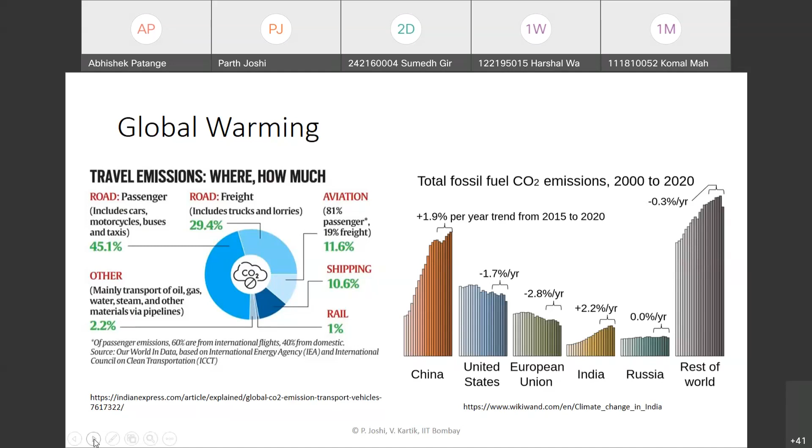Because the transport sector is a significant contributor to this issue, some alternative source of energy has to be looked at so as to curb these emissions.

If we look at the issue of air pollution, the pollution level in India has been witnessing an alarming rate. India was ranked around fifth among the world's most polluted countries, as reported by IQAir statistics. Among the most polluted cities, six out of the top 10 were in India.

If we look at the rankings by AQI for 2021, India was the ninth most polluted country in the world, and among the top 50 most polluted cities, 43 Indian cities were among the world's top 50. So we can see that the overall air quality in India has been becoming worse and worse every day.

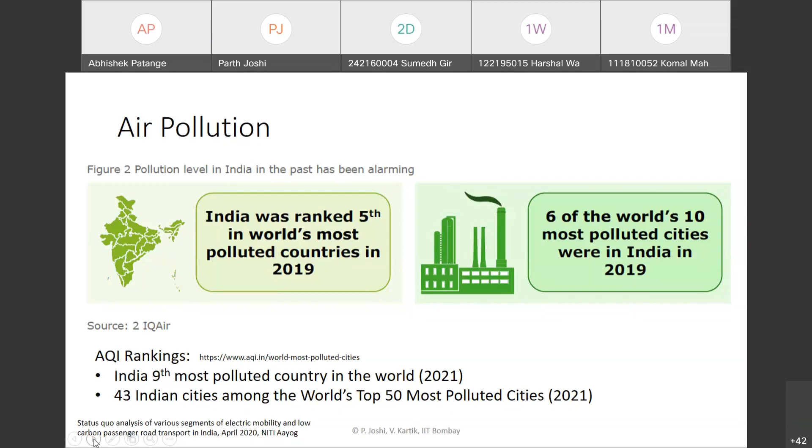One of the major pollutants contributing towards this are particulate matter of 2.5 and 10 micron size. This is because transport-related issues: there are a huge number of private vehicles in Pune due to the public transport situation, and currently there is a lot of metro related construction going on, causing traffic congestion in the city. We can see that being reflected in the air quality. The construction work is causing traffic congestion, and that's why the transport related emissions are very high in the city.

If we look at the oil and natural gas availability domestically for India, India has a very little share of oil reserves and natural gas reserves, about just 0.3% of the global oil reserves, and natural gas reserves are as small as 0.7% compared to global reserves. And if we see the trend in terms of availability, it has been largely declining over the years.

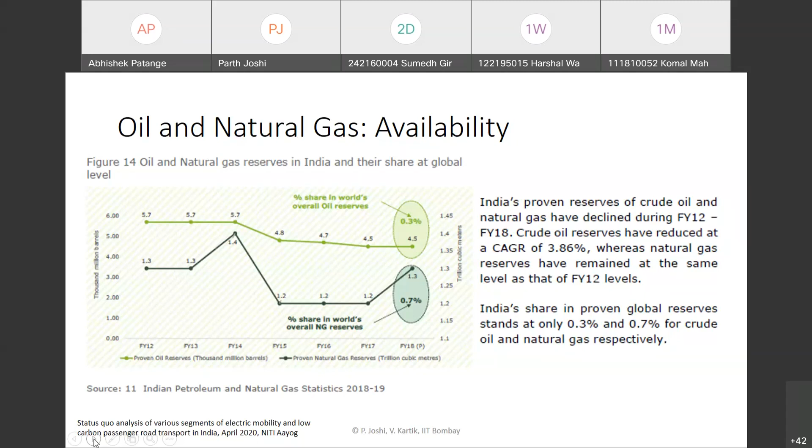There is a lot of dependency of India on imports. India has to import crude oil and natural gas substantially. If we compare the amount of production and import between financial year 2013 and 19, the production of oil has actually gone down, whereas the import has increased substantially. The import dependency has increased from about 84% to 88%. Whereas for natural gas, it has increased from 23% to 36%.

Oil and natural gas are both essential for producing fuels required for petrol and diesel, so the oil import bill has been always on the rise. For financial year 19, only 12% of the overall crude oil demand was met by domestic production, and for natural gas it was just 64%.

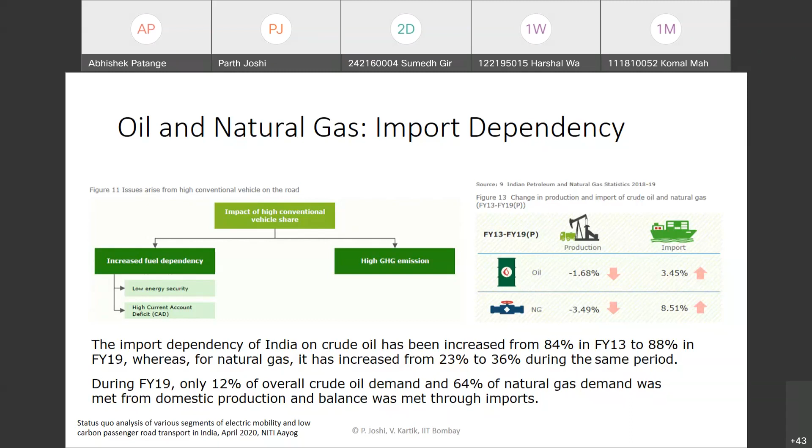So as we have seen, the issues of increased dependency of the country on conventional fossil fuels - if we have high conventional vehicles in the way ahead, the amount of import bill will keep on increasing, and greenhouse gas emissions would increase. India, as part of its commitment to mitigate this issue, signed the 2015 Paris Agreement. In the Conference of Parties, India has pledged to reduce its carbon footprint by 33 to 35% by 2030, to levels about which were there around 2005.

It has also pledged to increase the share of non-fossil fuels based electricity to about 40% by 2030. India has also set a target to reach about 30% EV electric vehicle sales by 2030, largely in the passenger cars segment.

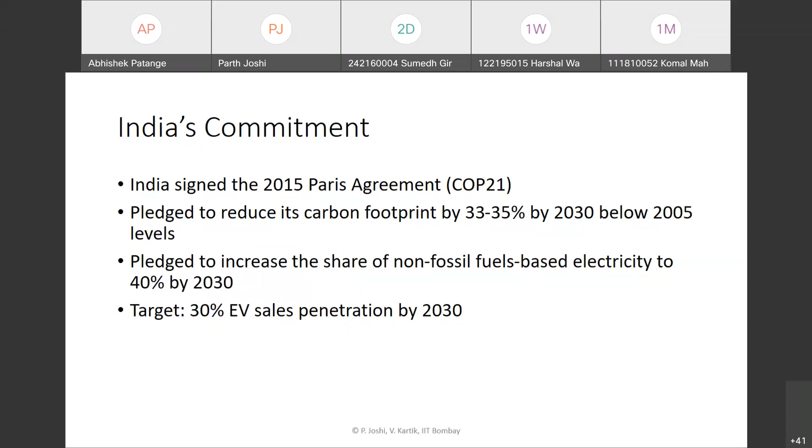So if we see the way ahead, it seems that electric vehicles are a promising pathway because they use electricity, which is clean energy, to increase energy security, reduce the country's dependence on oil imports, lower carbon dioxide emissions, and improve air quality in Indian cities.

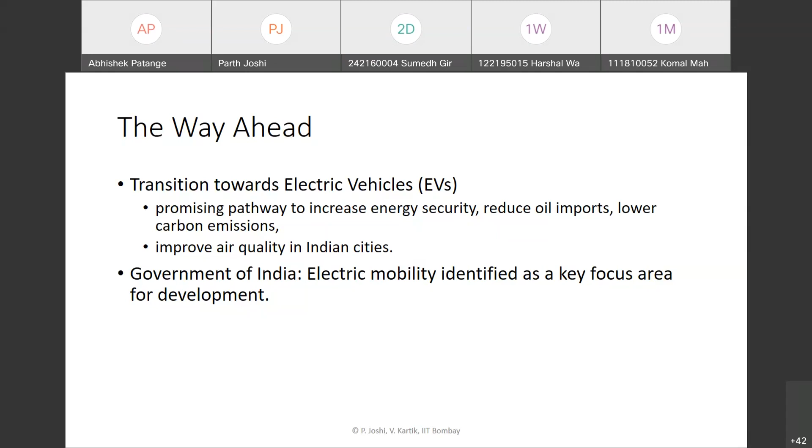Therefore, the Government of India has identified electric mobility as a key area of focus for further development, and the government has been pushing for electric mobility in personal vehicles as well as public transport through several initiatives.

If we look at the possible technology options which are clean, or involve zero or low carbon footprint, we can categorize them as electric mobility or low carbon technology. Low carbon technology would comprise fuels like CNG, LPG, methanol or ethanol - alternative fuels derived from more sustainable sources, which give rise to lesser emissions compared to petrol or diesel.

We also have other options like battery powered vehicles or fuel cell powered vehicles. Currently, over the last few years, the government has mostly been looking at battery powered vehicles.

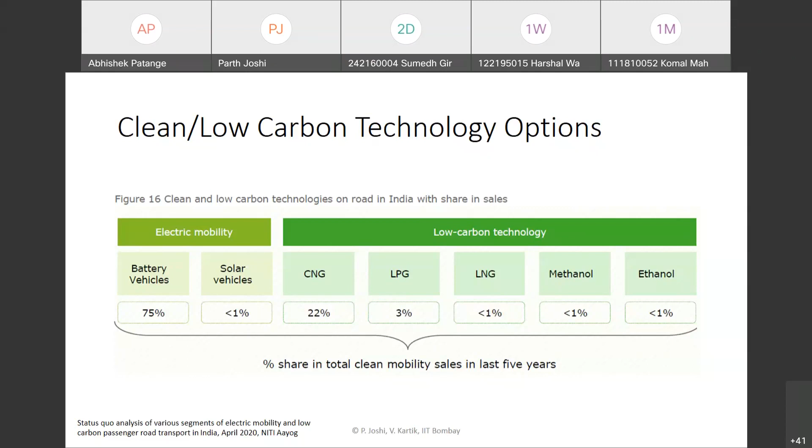As part of this transformation into electric mobility, NITI Aayog has proposed a new mobility paradigm involving shared, electric and connected mobility. This involves a larger amount of shared transportation - using more public transport instead of personally owned vehicles, more electric vehicles, and also connected vehicles, using artificial intelligence and similar technologies to draw on data and derive meaning from it, to develop useful solutions and make mobility related systems more efficient.

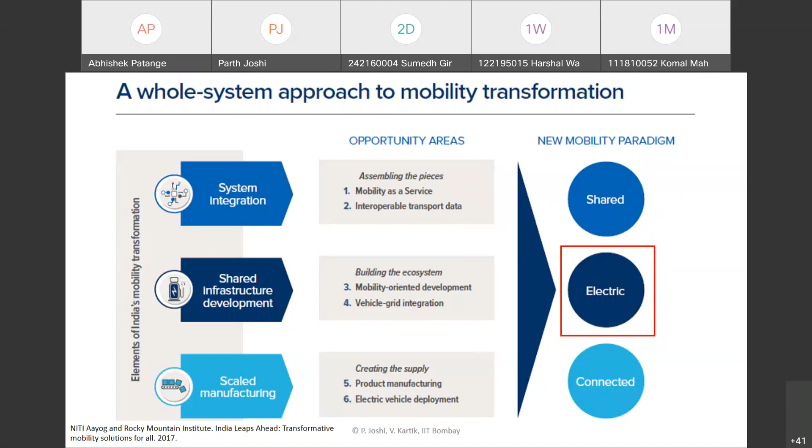The Government of India has been taking up several initiatives starting from 2011, when they launched the National Council for Electric Mobility, and around 2014 they launched the National Electric Mobility Mission Plan for 2020, where they defined several initiatives.

Around 2016 or so came phase one of the FAME India scheme. FAME stands for Faster Adoption and Manufacturing of Electric and Hybrid Electric Vehicles - a scheme to incentivize the purchase of electric and hybrid electric vehicles. This scheme was not very successful, but it provided some initial momentum.

Then around 2018 or 2019, the government launched the second phase of the FAME scheme, which provided further incentives, with an outlay of around 10,000 crore plus whatever residue amount was allocated to phase one of this scheme. So there is a huge outlay for this particular scheme, involving several incentives.

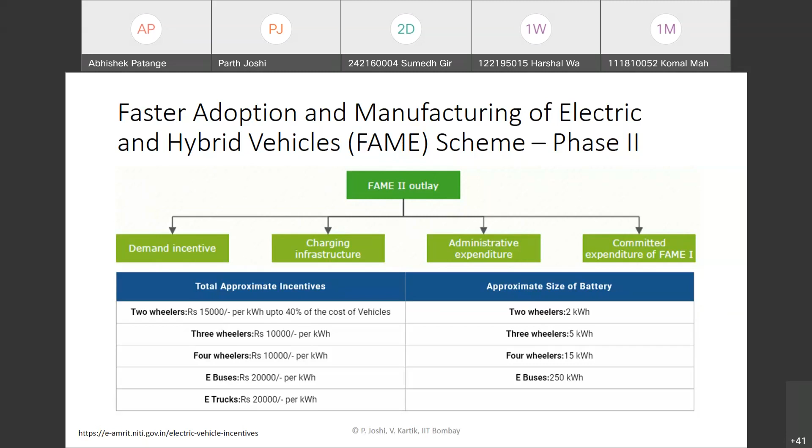Niti Aayog did a study to estimate the potential benefits of this scheme if implemented as planned, considering vehicles eligible under FAME, whether private two-wheelers, four-wheelers, or buses. Potential savings of about 5.4 million tons of oil equivalent are estimated, amounting to savings of about 17.2 thousand crores in energy.

The oil import bill is expected to be substantially reduced because of this. A substantial reduction in overall energy consumption is expected, about 170 petajoules, and about 7.4 million tons of CO2 emissions are expected to be reduced over the vehicle lifetime.

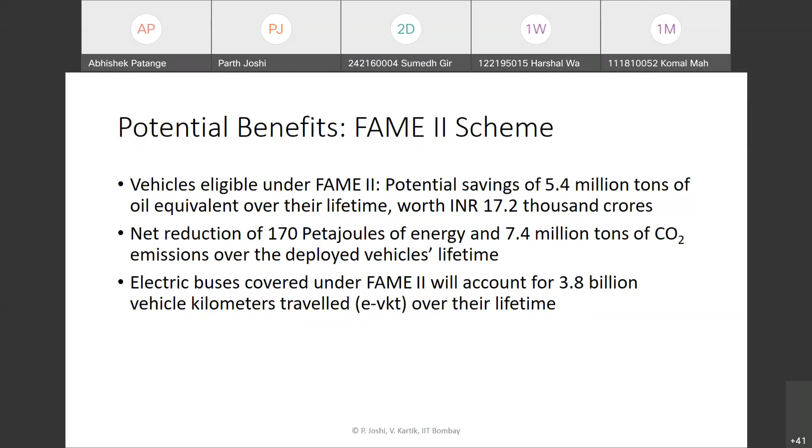These benefits are really promising. A further study was done by Niti Aayog considering the scenario till 2030, projecting the total energy savings and the amount of savings in CO2 emissions. These are very promising.

About 846 million tons of CO2 emissions would be reduced, and oil savings of about 474 million tons of oil equivalent. This is a huge number. We can see that this overall transition to electric mobility is very promising.

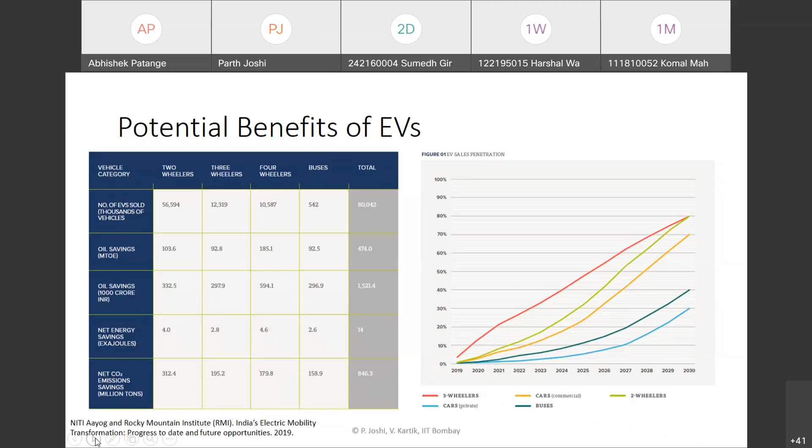Till now we have seen the overall background, and in the current scenario it is very important to study electric vehicles. So finally, we come to our topic of automotive transmission.

Before that, I just want to know if anyone has any questions or comments. I'll take a pause for a few seconds. Anyone has any feedback or comments to share? Am I going too fast or too slow? Any comments? It's just right, okay.

Sure, then we'll move on to our actual topic. The automotive transmission, while designing them, we have some major functional requirements. If we have to list them, I would like all of you to contribute in this discussion, so it should not be a monologue where I am just speaking, as it will become really boring. I would like all of you to contribute in this.

If we want to design a transmission for any particular vehicle, what are the factors we would consider? What different attributes would we consider? What are the different factors that are important when we want to design a transmission? Any guesses? Any ideas?

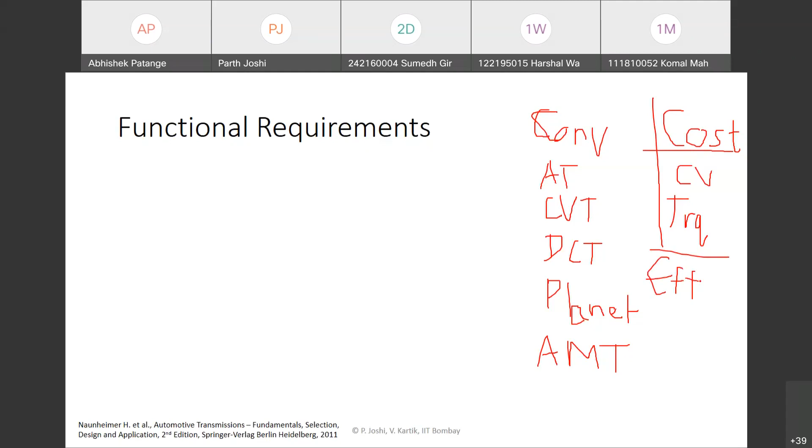So I was looking for something like this, like factors like cost, or one factor may be efficiency. So we need to have a high efficiency transmission.

So if we look at the different functional requirements of transmission, we can probably come up with some of these factors which have been listed out. Some of you already covered, like high efficiency or cost, and you also covered some applications.

Basically, we need a fuel efficient way to transmit power from the source to the load. This is the major part of the transmission design, the major requirement, and we'll also be mainly focusing on this in this particular unit - how do we efficiently transmit power from the source to the load for different operating conditions?

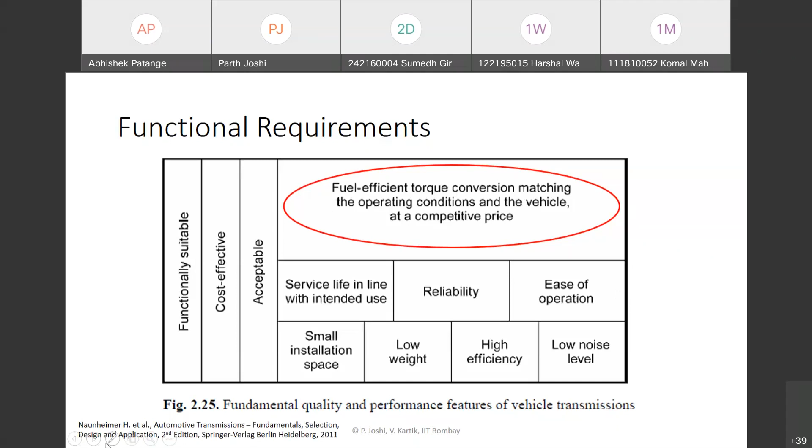There are other factors like reliability or ease of operation. So as you mentioned, AMT for ease of operation - DCT or AMT or AT, whatever for that matter, they involve minimal effort from the driver. So they involve a lot of ease of operation, but they may not always be reliable, or they may not be very cost effective.

DCT is basically dual clutch transmission - I'm not sure if others are aware of this technology. It's an expensive technology, although it provides very smooth shifting between gears. Automatic transmissions involve torque converters, which are not very highly efficient - they involve a lot of losses and heat generation. The automatic transmission may also become bulky, and even dual clutch transmissions may become bulky. So there are different factors like this.

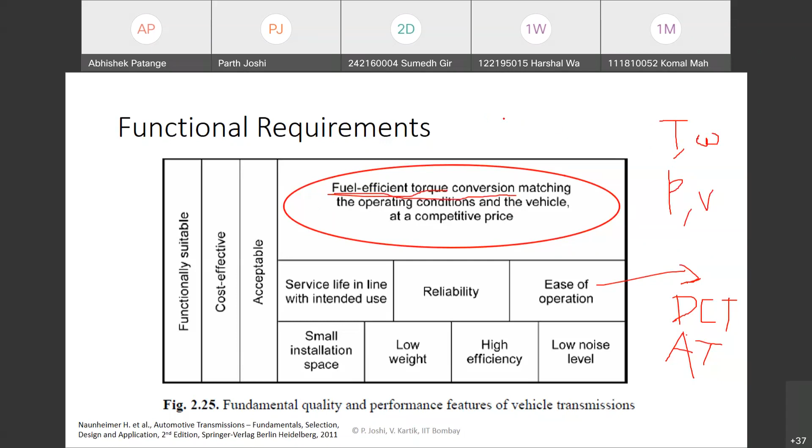The key factor is basically fuel efficient torque conversion. If there is a certain torque and speed requirement at the wheels, or power and vehicle speed requirement at the wheels, and there is a certain source - maybe an IC engine or electric motor or any prime mover - what is the torque and speed at which the prime mover should operate, such that for every power versus vehicle speed requirement, we get the appropriate value of torque and speed so the source operates efficiently, and we also get the required power and vehicle speed.

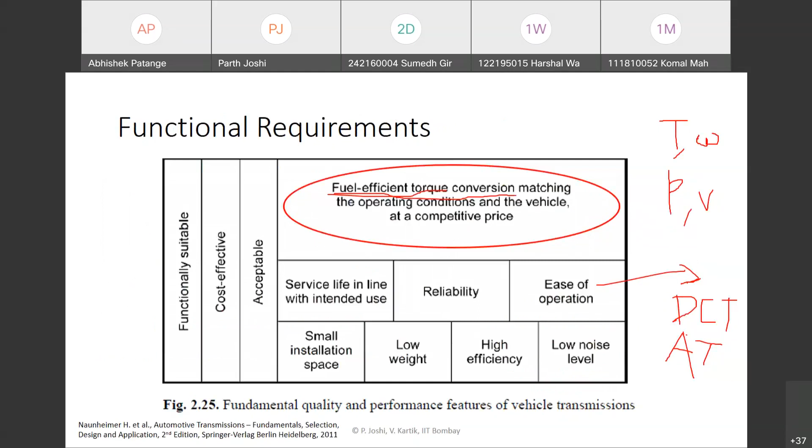If we look at typical power source characteristics, for an ideal source of power, we would like to have the entire maximum rated power available throughout the entire speed range. If you look at the corresponding torque versus speed, constant power would imply torque into speed - power is basically torque into omega, the angular speed of the wheel - that is constant, meaning torque equals some constant divided by omega. So if we look at the torque profile on a torque versus speed map, we can see that this is a hyperbolic kind of profile.

So, sorry for the poor writing.

There is a certain limit because of the interaction between the tire and the road. There is a limit to which the wheel or tire can take up and transmit torque. It is governed by the adhesion limit, a term we will see later on. So basically, there is a certain maximum torque which the wheel can transmit, which depends on the tire material, the road material, the nature of the road, and the operating conditions in that contact region between the tire and ground.

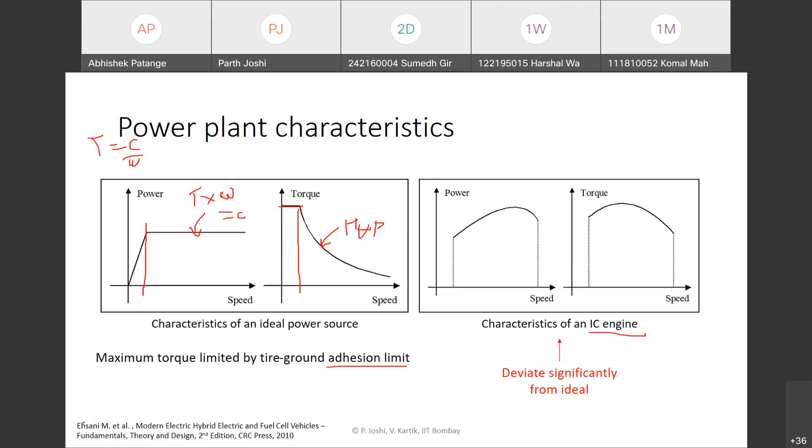So if this is understood, conventional vehicles largely utilize IC engines as their power source. So if we have to answer this question: why do vehicles need a transmission at all? We looked at the characteristics of an ideal power source and that of an IC engine. If we have to visualize the function of a transmission, what do you think is the reason? Why do we have a transmission at all in a vehicle?

In conventional IC engine vehicles, the engine does not have the maximum torque at the start of the vehicle because it gains torque at a higher speed. So to start the vehicle from zero, we need some torque multiplication to propel the weight of the vehicle. That is why we need a large gear, and a large gear cannot take us to higher speeds—it has some limitation in speed. So that is why we need shorter gears as well, and multiple ratios in an IC engine.

As in the case of a motor, we need to reduce the size of the motor as much as possible. So for the required torque, we can use the least size of motor with a single gear transmission, or we can also use a CVT transmission. So the most important thing is that we need torque multiplication in transmissions.

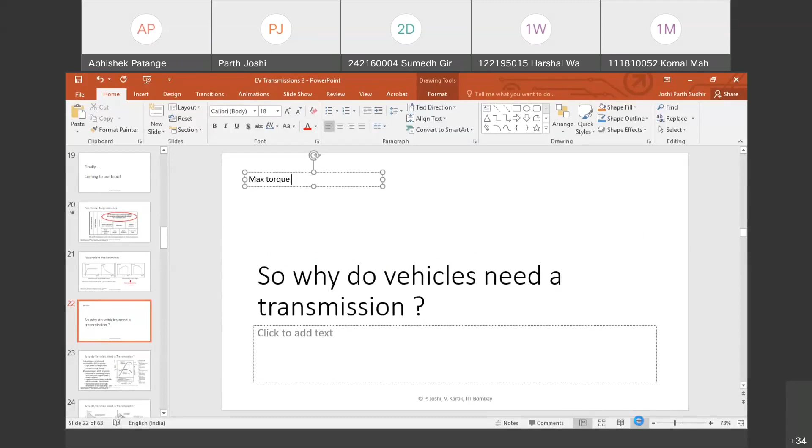So the primary reason for using a gearbox in IC engine vehicles is that the engine cannot provide its maximum torque at the slowest speed, which is basically when we are starting. So we need a large gear to multiply the torque coming from the IC engine to propel the vehicle from start. And since the large gear cannot take us to higher speeds, we need a shorter gear. That is why we need multiple gears in an IC engine vehicle, to satisfy the requirement of the driver's curve. And in electric vehicles, we need it to reduce the size of the motor for the given torque.

So why do you think the IC engine's maximum torque is not available from the starting?

At the start, the speed is less, so we get less power, as much is required. The force required is also less, and force obtained is also less from the engine at lower speeds. Even the combustion is not at its maximum efficiency because efficiency rises at higher speeds, so some of the fuel is just left out of combustion. Pressure is also less in the cylinder.

So as you said, if we use a very high gear we get a boost initially, but we are not able to increase the vehicle speed beyond a certain limit, right? So why is there a certain limit on the engine speed?

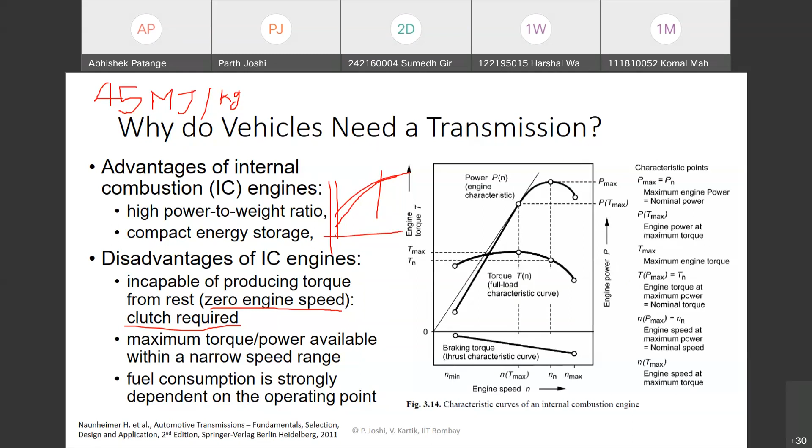So let us say if we do not use a transmission, if we just directly connect the IC engine - let us say this block is the IC engine, and this is the clutch, and we also have a single gear ratio between the clutch and the wheels. So let us say these are the wheels, which includes basically the differential and all these things. So basically there is a single gear ratio between the IC engine and the wheels.

So if we calculate, by multiplying the torque of the IC engine output torque into the gear ratio, that would be basically the torque available at the wheels. And the engine speed, let us say omega e - so r times omega e, where r is the wheel radius, divided by the gear ratio, let us say this is g - that would be basically the vehicle speed, considering this gear ratio.

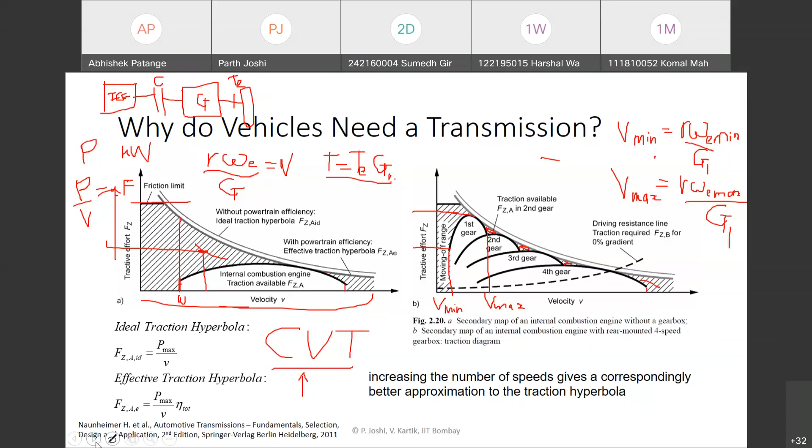So we have seen that by using multiple gear ratios, we are able to cover this torque speed envelope substantially. Apart from that, what the transmission provides us is basically a flexibility or a choice to select the engine operating point. By using this choice, we can place the IC engine point such that we are able to provide the required torque at the required vehicle speed, and we are also able to operate the IC engine in its greater efficiency region.

Let us take an example. If we want to drive our vehicle at a speed, let us say 35 kilometers per hour, and we are driving a car. I hope most of you have learned how to drive a car. So let us say if we take a speed of 35 kilometers per hour for a passenger car, which gear would we be normally operating the vehicle in?

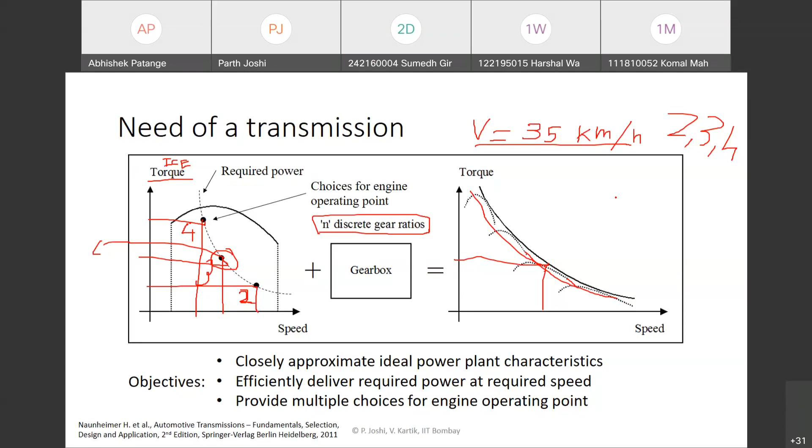So if we look at the typical characteristics of the conventional vehicle's IC engine—basically why I am going into conventional vehicle details is that you probably have learned these things already, but in the context of transmissions for electric vehicles, it is very important to understand. The earlier automotive transmissions designed for conventional vehicles—what factors are they designed based on? The characteristics of the power source itself are so important that they form the basis on which the transmission of any vehicle is designed.

So the transmission is designed so that we can deliver the required torque at the required speed, while operating our power source as efficiently as possible. Based on the behavior of the power source—IC engines in conventional vehicles—we design the gear ratios such that in the typical operating range of the vehicle, we are able to operate the IC engine in its most efficient torque and speed range, and also run the vehicle according to its required power versus vehicle speed map.

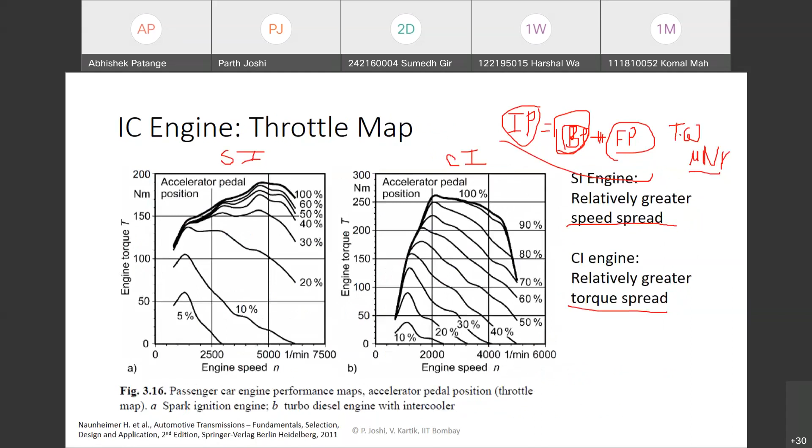Now if we come to electric vehicles, which are primarily powered by electric motors, we have to compare the typical behavior of the IC engine versus that of an electric motor, so we saw the ideal torque-speed and power-speed kind of profiles.

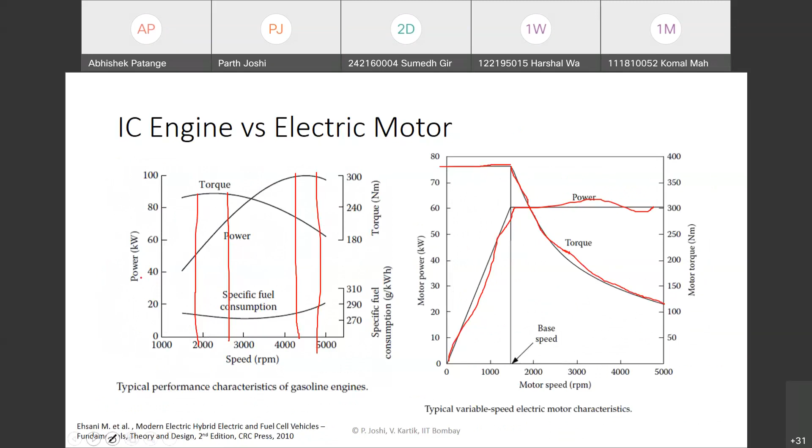Now, we have seen the maximum torque and maximum power characteristics. Now if we look at the aspect of efficiency...

So can anyone tell me what is brake specific fuel consumption? It is the equivalent fuel consumption for a unit of brake power. Okay, so can you tell me the equation to calculate the brake specific fuel consumption? Or let's say, what is the unit, that will probably become easier.

Grams per kilowatt hour. Okay, fine, grams per kilowatt hour.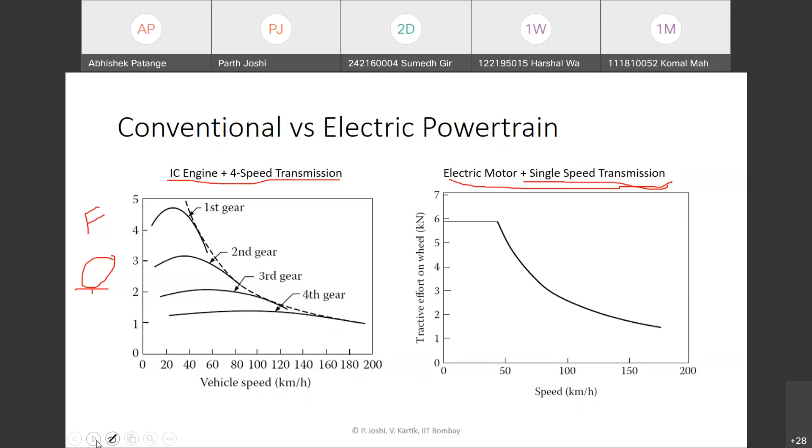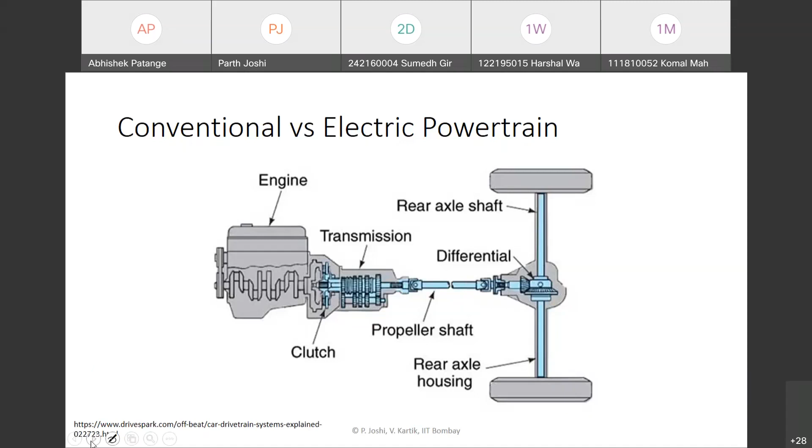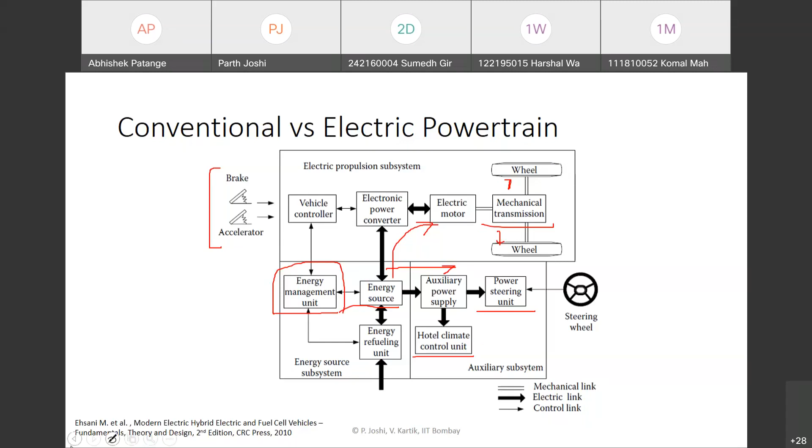So what can we expect in a typical electric vehicle powertrain? I hope everyone understands this word called powertrain. Powertrain basically means the way in which different components are connected from the energy source up to the load, or basically the fuel tank to the wheels, or the battery to the wheels in an electric vehicle. So what can be the different layouts or configurations that we can expect?

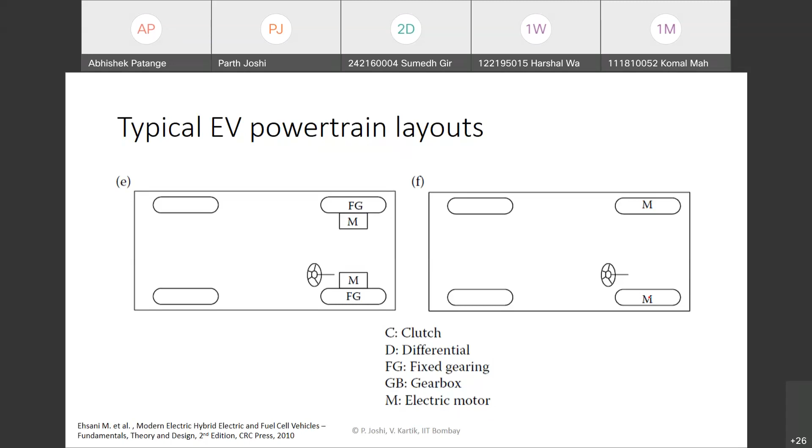So then that may seem very simple, but it's quite challenging to implement because we need a very high torque motor, since there is no gear ratio available. We need very high torque versus very high vehicle speed range of operation. It may be challenging to implement in any particular vehicle.

So these are some typical layouts, and there may be even more layouts possible. Different companies have explored different concepts. Companies like Tesla, Porsche, and other OEMs have all explored different configurations. We'll explore them in our later sessions.

So different particular configurations may be possible depending on the requirement. Many companies have innovated in this particular space. They have come up with very interesting layouts and different ways by which they can meet the performance and efficiency requirements.

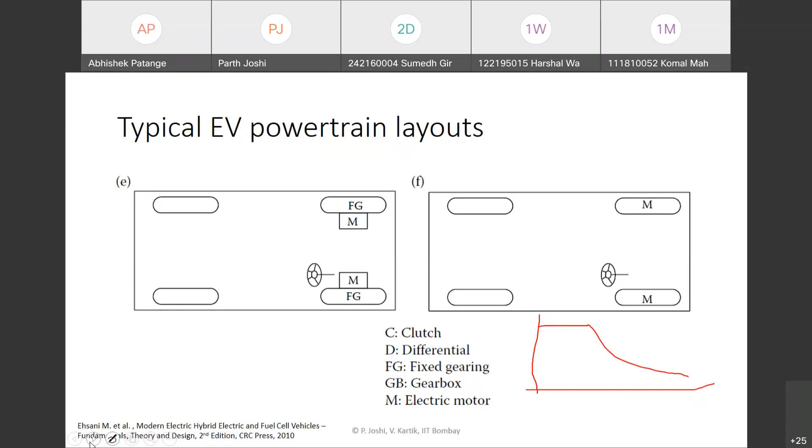We'll discuss them in the further session. So I would like to close today's session.

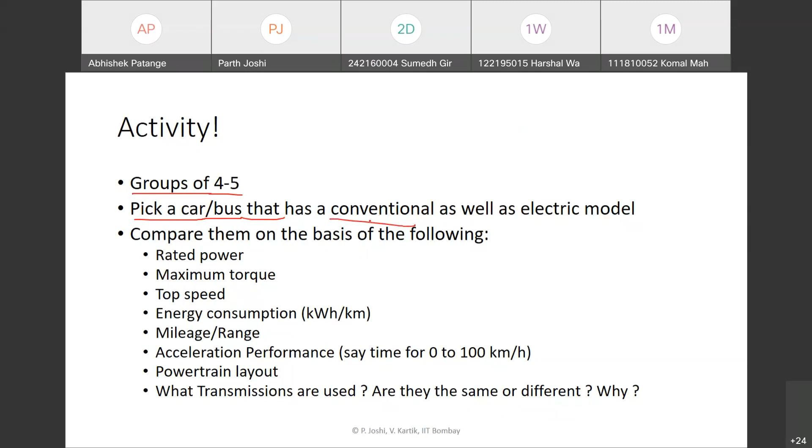We will divide ourselves among groups of 4 or 5 people, and we will pick a car or bus application. We can consider any model which has both a conventional model as well as an electric model of the same vehicle, especially among Indian OEMs, though there may be other OEMs overseas as well.

So we can pick a car or bus which has a conventional as well as EV version, and make a comparison based on these metrics: rated power, maximum torque, maximum speed, typical energy consumption characteristics, mileage or range figures that are reported, and acceleration performance, which is generally reported as the time required for the vehicle to accelerate from 0 to 100 kilometers per hour or something like that.

What is the layout of the powertrain? How are the different components connected? And most importantly, what kinds of transmissions do they use? Between the conventional vehicle and the electric vehicle, are they using the same transmissions or different ones, and why might they be different? Please try to collect as much information as possible.

I suggest that you prepare maybe one slide comparing the electric and conventional models based on these parameters. Try to get as much information as possible, even the transmission gear ratios if you can, and then we'll have a discussion in class.